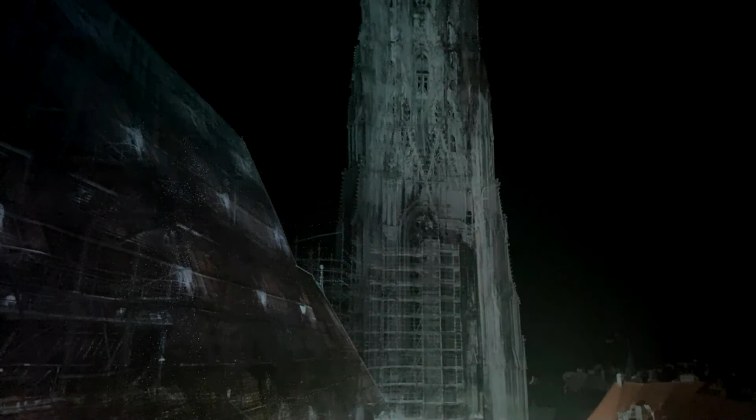Yeah, and now we're looking straight at, I would say, really the landmark of Vienna, the South Tower of St. Stephen's Cathedral. Here it is. 136.4 meters tall, am I right? And it's not only height, it's considered to be the most beautiful Gothic tower, at least in Vienna, in the world. We think so.

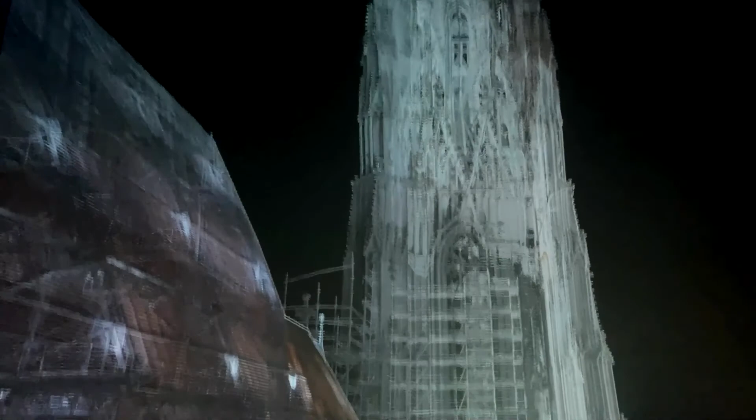So with the typical Gothic decoration, everything is kind of striving upwards to the sky. And just compare it to this tower here. This is the Romanesque structure still, totally different. And obviously the older part of the cathedral anyway.

Yeah, and quite outstanding also is St. Stephen's roof. And one very special thing is we can, through this transparent laser scan, now also take a look here in the attic. We're going to look for some points with high resolution pictures, like, let's take this one.

Yeah, and the construction of the roof here is now made out of metal since after World War II. And maybe Mr. Zehetner can tell us a bit more about the whole structure.

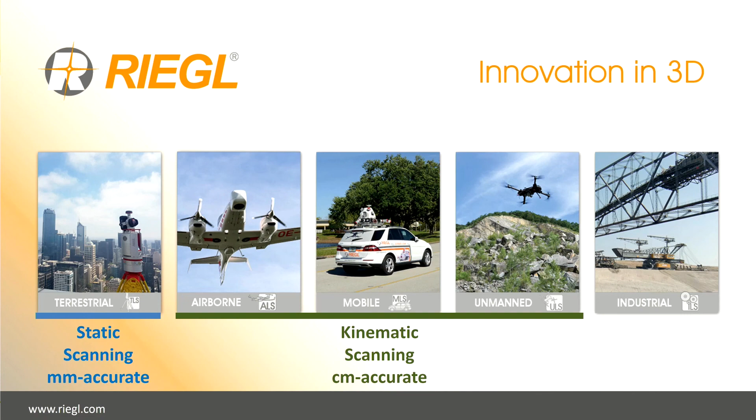This is the product line of our company. It's an Austrian-based company with more than 230 employees, located in Horn, about 80 kilometers from Vienna. We are a manufacturer of terrestrial scanners, airborne scanners, mobile scanners, and UAV scanners, so also on the drone. If you look to the terrestrial scanner, it's millimeter accurate, and all the other kinematic scanning systems are centimeter accuracy.

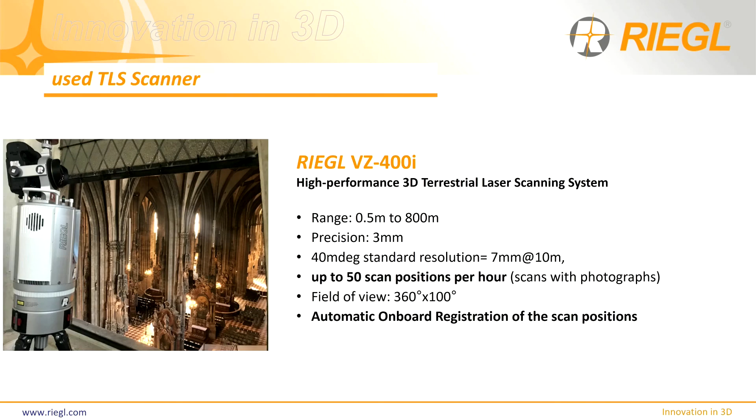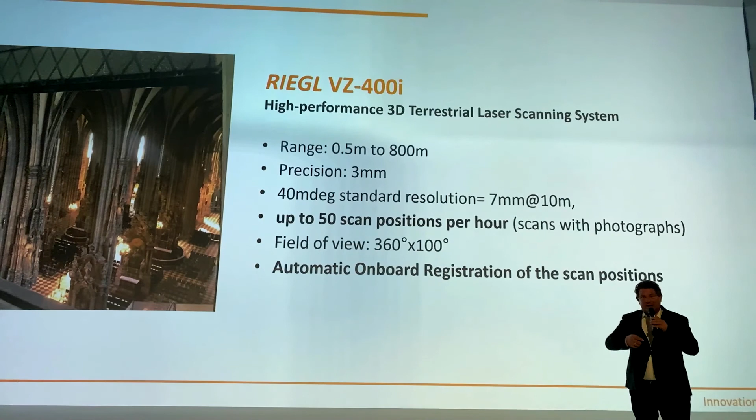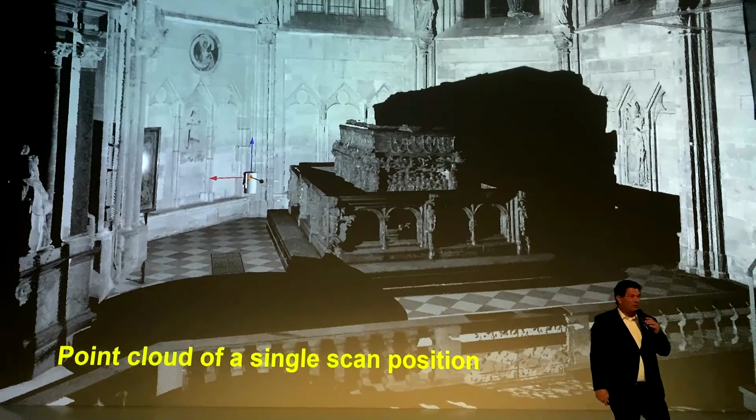The scanner itself, it's only one slide, has a range of up to 800 meters, a precision of 3 millimeters, and very specially we can take 50 scan positions per hour, and all the scans are registered, merged together inside of the laser scanner. A single point cloud has a hole underneath and on top of the laser scanner itself. What you see is a gray-colored so-called reflectance, and we have more than 22 million points within 45 seconds, together with 5 to 8 high-resolution photographs.

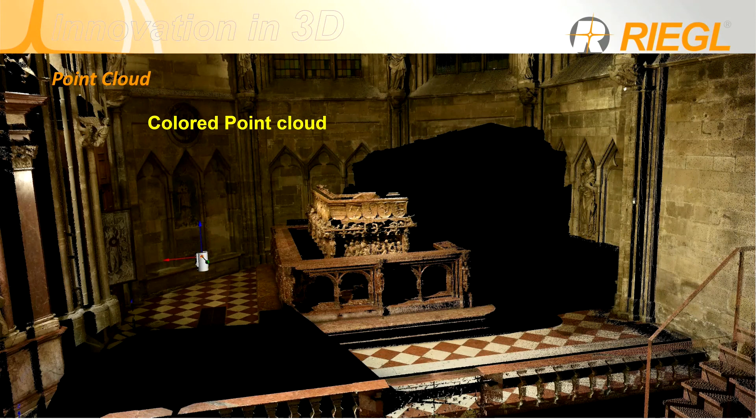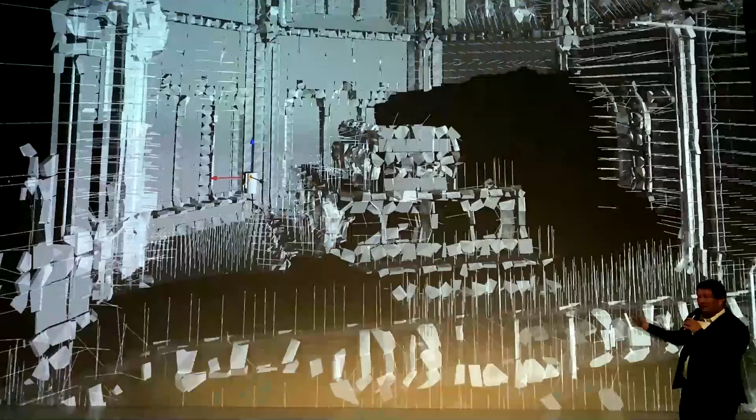These photographs allow us to colorize the point cloud, and we move the scanner every minute to the next scan position. And so it's possible to merge all these scan data together. The whole project has more than 1,000 scan positions. And to merge it together, we simplify the point cloud in the scanner to a so-called voxel file. In each voxel, we have a plane. Each plane has a normal vector, and this data allows us with a special algorithm to merge all these scans together.

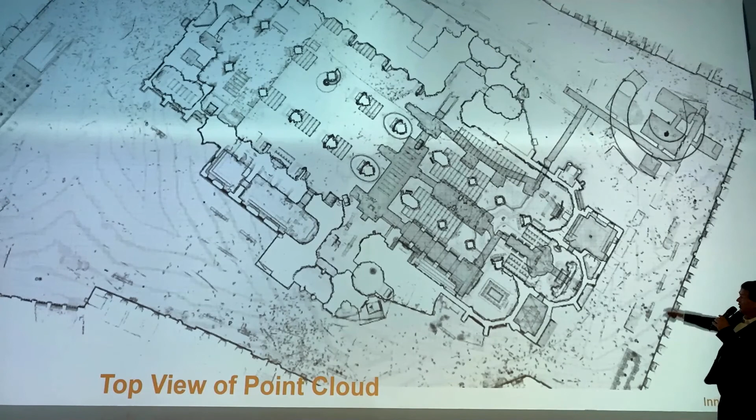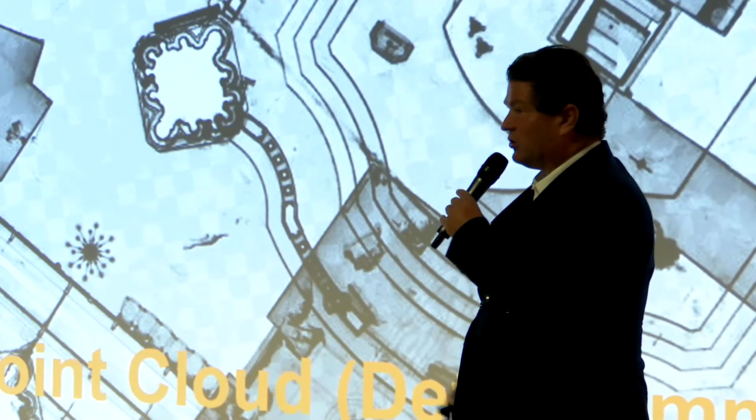1,000 scan positions give us a picture, for example, from the top of the cathedral itself, the catacombs underneath, the roof on top, and also the Stephansplatz, the square around St. Stephen's. If we go a little bit more in detail, this is a view never seen in the past. So it's the church underneath, or the catacombs, together with the internal room of the cathedral. The so-called 3D point cloud, actually it's reduced already, looks like this, and you can see on the right side how many scan positions are necessary to reduce the so-called scan shadows.

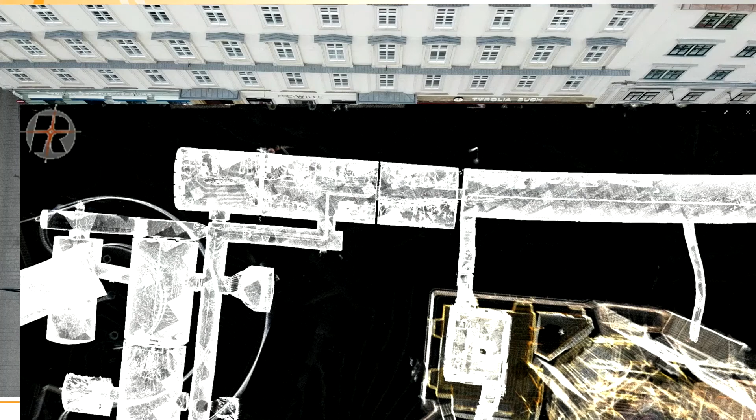I was quite impressed what's underneath the Stephansplatz, the square. You see on the left side the garage, and if we jump into the data, I go forward, backward, forward, and you see how many rooms are inside the cathedral, outside the cathedral, and it's a lot of history of all these rooms. With this side view, it's an orthogonal side view of the cathedral, I hand over the microphone to Magister Franz Zehetner.

Thank you. In this 3D model of the cathedral, you can see both the north and the south facade, and you can see some differences and irregularities. For example, a slight angle between the axis of the nave and the choir.

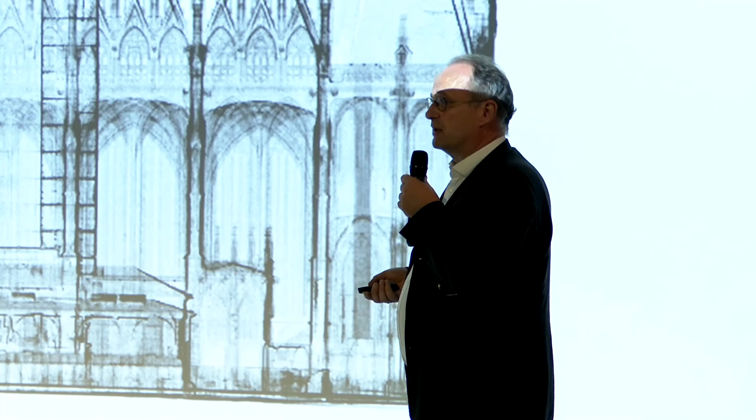Another thing you can see on this model is the scaffold on the south tower and on the south facade. Scaffolds are necessary for the maintenance and restoration of our cathedral, for which the workshop is on duty. Active since the Middle Ages, 20 people are dedicated to the preservation of our cathedral, and this permanent work on the cathedral gives us a very intense knowledge of the structure and the problems of the cathedral.

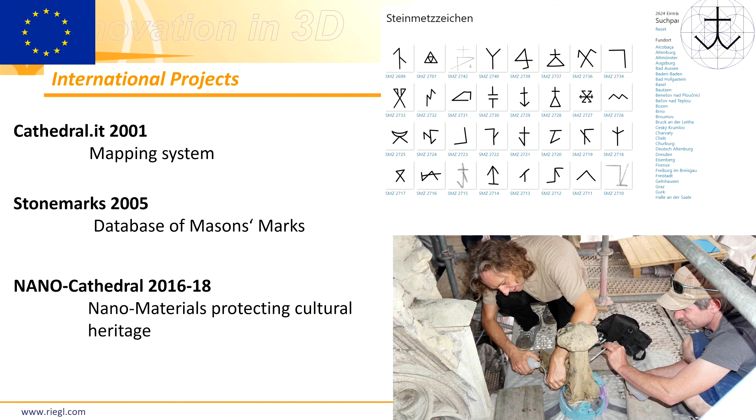Our masons still use the traditional techniques known and practiced since the Middle Ages. Here you can see a capital copied by one of our masons after a damaged original. On the other hand, we are active in research in partnership with some universities and also in EU-granted projects to enhance the possibilities of our restoration work.

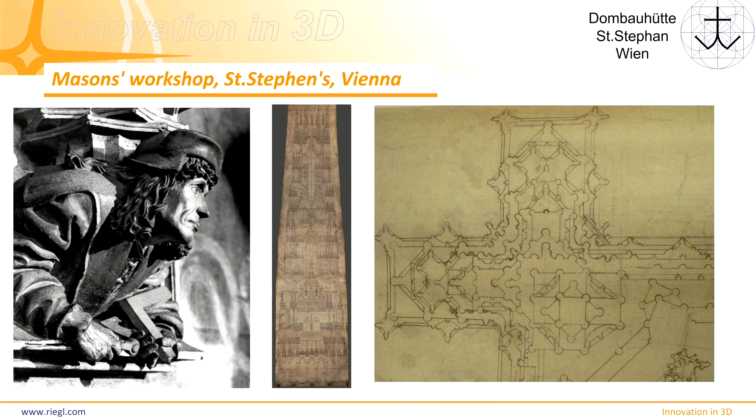Plans were always crucial for building, maintaining, and preserving historic buildings. In the Middle Ages, they had plans for details, but also for great structures such as the steeples and towers of the cathedral. Measuring equipment was very important for the masons. So not hammer and chisel are the symbols of the medieval masters. It is the angle and the circle, as here in the self-portrait of Master Anton Pilgram, one of the cathedral architects of the Middle Ages.

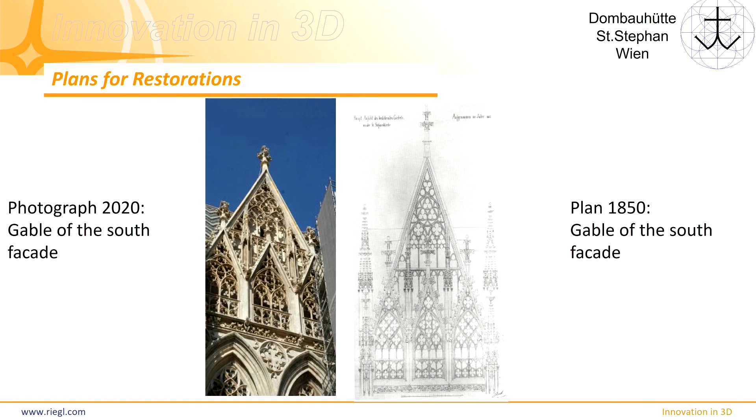When people restored Gothic cathedrals in the 19th century, they had to complete some unfinished parts. Here, for example, on the south facade, but essential were intense studies of the completed parts, as we can see on a plan, which was the pattern for the completion, which was not a total copy of the finished things, but just an inspiration to do independent work.

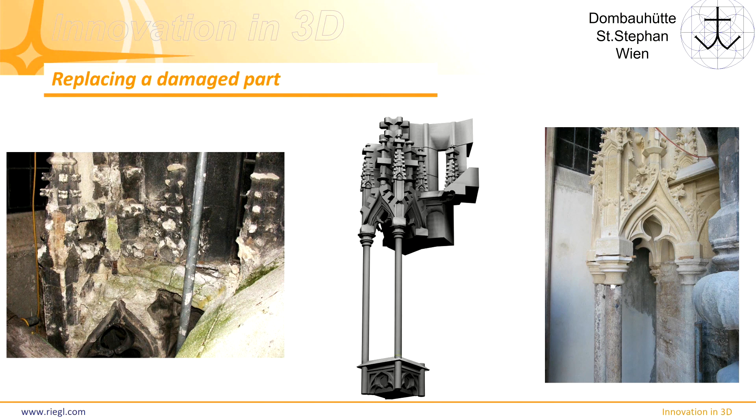Nowadays, we concentrate on the preservation and not on the copying of historic materials. In some cases, however, it's inevitable to make a copy of a totally destroyed piece. For example, here a tabernacle, which was made by craftsmanship, but the plans and the structure were constructed in a 3D CAD system on a computer.

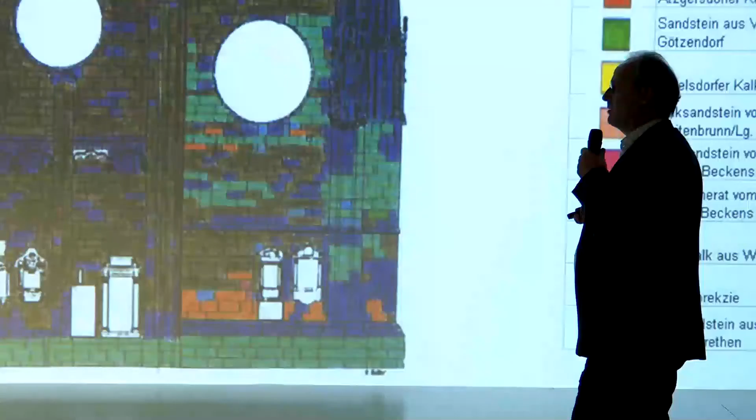To come to the whole structure, here is a plan of the western facade based on a photogrammetric plan made in the 1990s. It shows the different varieties of limestone, and the different varieties have different properties in physics, chemistry, and decay, and so they have to be treated in a different way. We also map our activities on plans like that to preserve the activities and the knowledge about our activities for future generations.

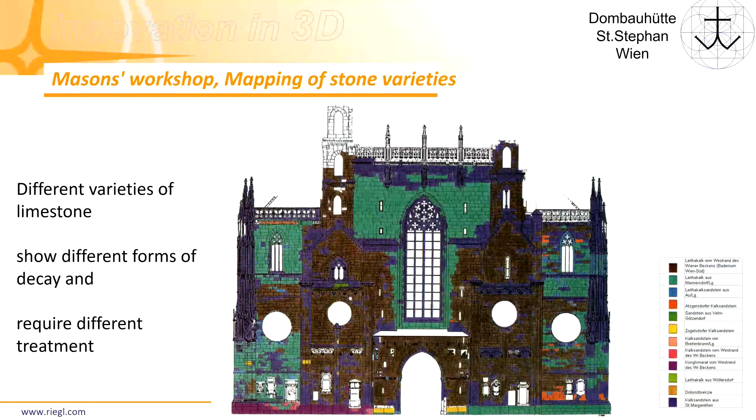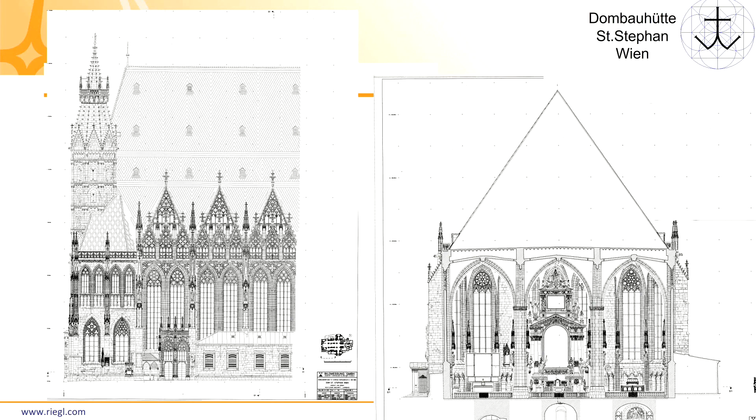This is the basis for this planning work, the 1:50 scaled photogrammetric plan, but some parts are not visible here because it shows only the main views of the cathedral, and we are limited in our studies of the structure to the main directions. Survey plans are essential for the documentation of the state of a cathedral. St. Stephen's was damaged in 1945, but as we know, also in peaceful times, cathedrals are vulnerable and endangered.

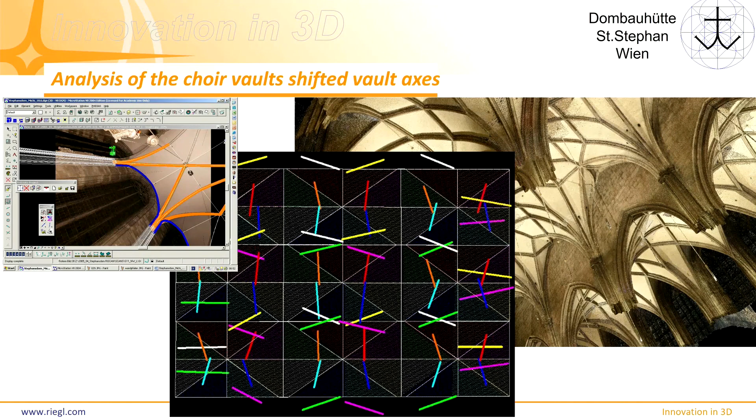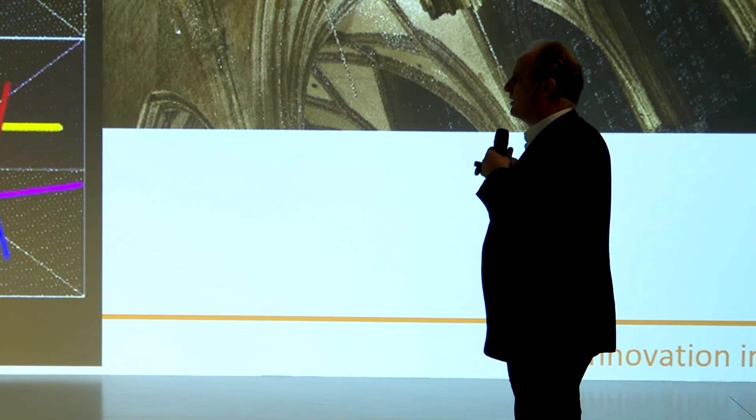We had a first 3D laser scan in 2005, and we got some very interesting studies on the geometry of the vaults. Here you can see the vault of the choir, a very ordinary cross-rib vault, and you can see in some parts the axes of the cylinders and cones the vault is constructed of are not regular. In every bay, the direction of the axis differs. So the towers, which have a very, very high weight, deform the foundations of the cathedral and deform the walls.

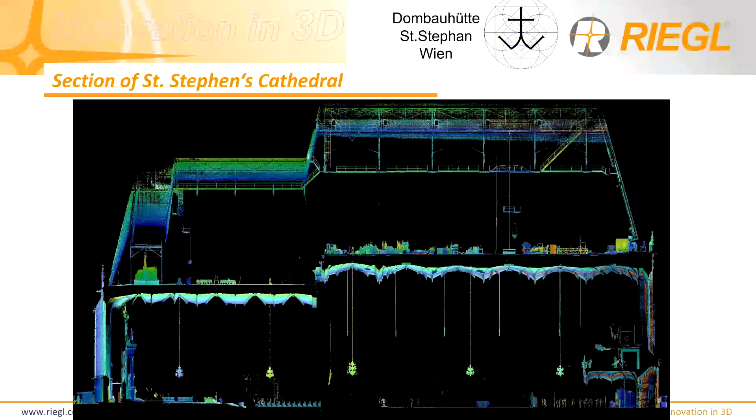Here is a section based on the actual scan, and it shows in a very impressive way the cathedral from the catacombs to the top of the roof, and it shows also the structure of the vault and other static structures.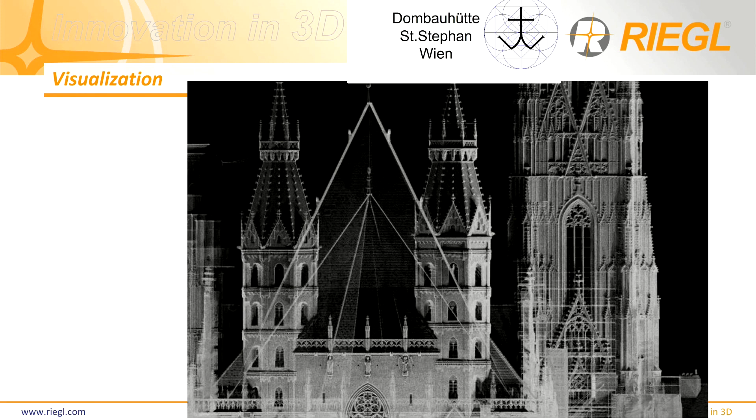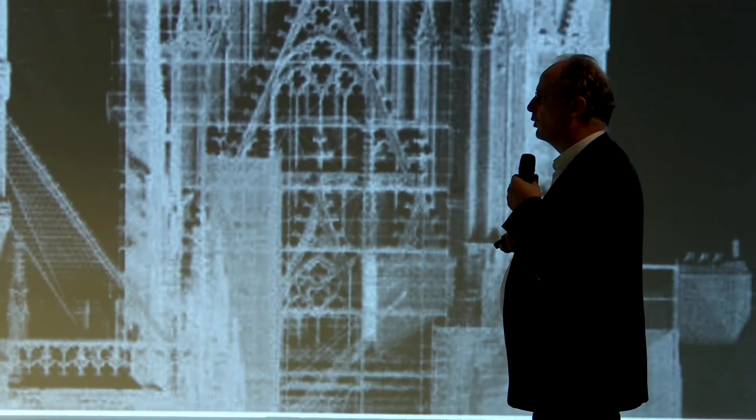And to close with this view from the western side or the eastern side, we can compare the different parts of the roof, and we can also see the differences in the western towers. If you compare them, they seem symmetric, but they differ in very, very many ways. Of course, that was known to specialists before, but now the visualization shows it for everyone and is accessible

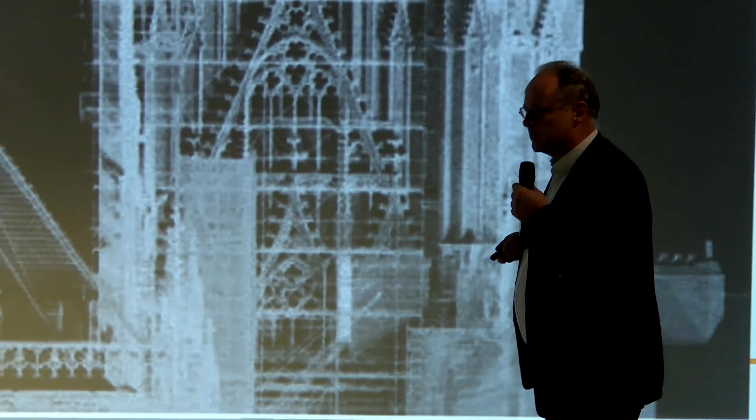for everyone. Thank you for your attention, and now back to the amazing 3D point cloud.

So, and here we're back underneath the roof in the attic of St. Stephen's Cathedral. And what is quite interesting, you have seen this also on the plans, the roof is extremely steep, isn't it? Why is this? That had historic reasons that go back to the 15th century. In difference to some of the big cathedrals in Europe, St. Stephen's originally was not a bishop's church, not a cathedral, it was a public church, and the type of this church was a hall. And the hall does not have a higher central nave than the side naves, and so Vienna had the biggest roof of all the cathedrals, and still has.

And since in Vienna we have a lot of snow also, it was necessary to build this large roof that covers all the naves under one, as we say in Vienna, get everything under one hat. The snow must not stay on the roof. So they built it so steep that whenever, until today, we have more than 8 millimeters of snow, the snow glides down and the roof is free. That's interesting, of course, yeah.

And this large, more than 10,000 square meters of roof for the, at this time, not so big city, would have killed the whole silhouette, just an area of red bricks. So they invented this nice pattern to make this huge area look nicer.